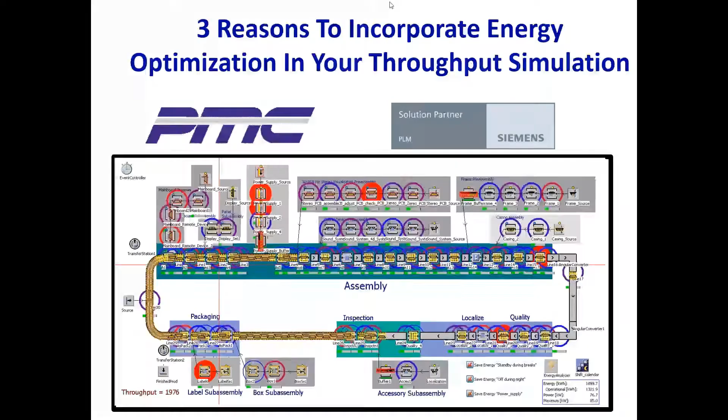We'll start with a brief overview of PMC. Next, we'll list pain points that are specific to energy efficiency and PMC's solution that addresses those pain points. Then we'll dive into the details of our solution. Finally, before we take questions, we'll wrap it all up with a demo follow-up and a couple other topics.

Before we dive into today's topics, I'd like to share a brief introduction to PMC. Since 1979, PMC has helped over 700 companies by completing more than 7,000 performance-enhancing initiatives worldwide. Our commitment to excellence has brought us to the point where we are the largest independent industrial engineering services firm in North America. Our next topic is an overview of energy efficiency optimization.

Energy optimization has several pain points, including the U.S. Energy Information Administration predicts a 56% rise in energy consumption between 2010 and 2040. The industrial sector accounts for over half of global delivered energy. Growth is predicted globally, but it's greatest in non-Organization for Economic Cooperation and Development countries like China and India. Obviously, this puts a lot of pressure on utilities to increase their capacity and on industry in the form of rising costs.

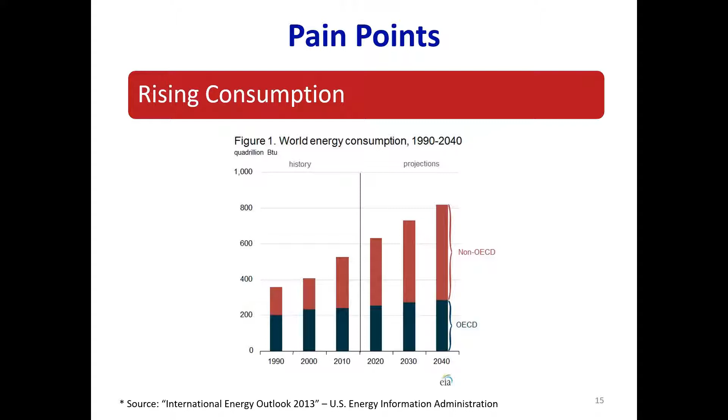The terms green along with sustainability are becoming more and more popular. More companies are incorporating green initiatives, and more consumers are becoming aware of the importance of green products and services. Green certifications are becoming more popular, and so are the number of consumers who make purchase decisions based on these certifications, as well as organizations and governments that require the purchase of environmentally preferable products and services.

The Green Seal has been around since 1989. Their standards cover over 375 product and service categories. Energy Star is an international standard for energy efficient products, appliances, and buildings originated in the USA. It was created in 1992 by the Environmental Protection Agency and the Department of Energy. Other countries like the European Union, Australia, and Japan have also adopted the program.

Unlike other certifications that are primarily known for products, the U.S. Green Building Council is a non-governmental organization that promotes sustainable buildings and cities. They developed the Leadership in Energy and Environmental Design, or LEED, third-party green building rating system that includes 4 levels of certification: certified, silver, gold, or platinum. At least 18 other nations have similar councils.

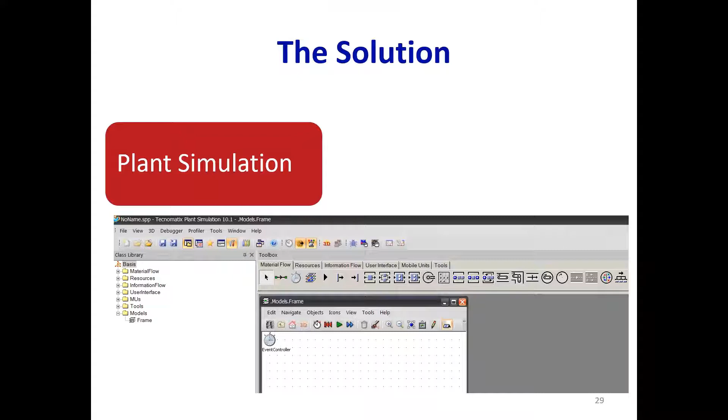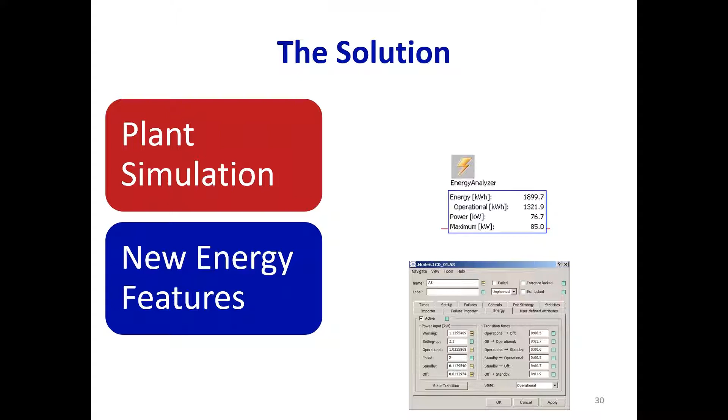Second, while Plant Simulation has always provided a powerful engine to build, analyze, and optimize your processes, the new energy features that were added to Plant Sim's recent version now let you simulate energy consumption and analyze and optimize energy efficiency. Our next topic covers the details of our plant simulation energy solution.

The first reason to incorporate energy optimizations is to reduce energy consumption, which translates to reduced cost for you. In other words, you can increase your profit margins. Optimizing energy efficiency can also result in reduced failures and maintenance needs. Energy optimization can also help you to achieve green certifications like the U.S. Green Building Council LEED certifications and to meet regulations and mandates. This can help to raise the reputation of your company with your customers and help you to qualify for possible tax rebates and zoning allowances.

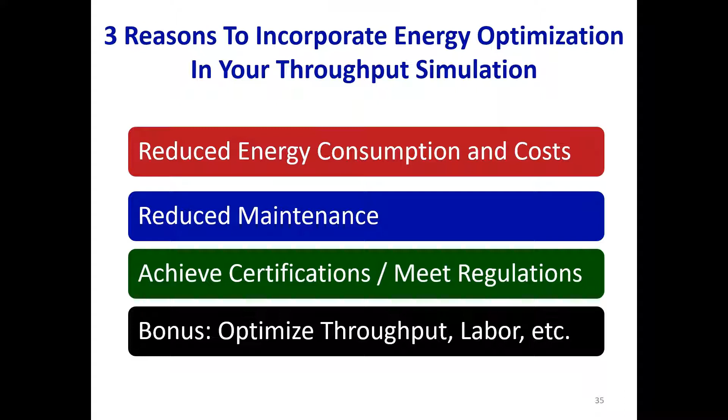Since energy optimization features are seamlessly incorporated into PlantSim's traditional throughput simulation features, you automatically have a simulation you can use to play what-if games to increase throughput, minimize labor, minimize inventory, or optimize scheduling.

The new Energy tab appears with the other input and output tabs and several objects that PlantSim provides to model stations, machines, conveyors, etc. This lets you model the dynamic energy management available in modern control units like Siemens S7-300, using the PROFIenergy protocol without any custom programming. So you can easily experiment with energy what-if scenarios in a virtual environment.

The left side lets you specify the power input in kilowatts required for a station's various states, like when it is setting up, working, failed or down, or standby. The right side lets you specify the transition times between energy states, like operational to standby.

The state transition button even lets you model the saving of energy, specifying energy state transitions for pauses or breaks within shifts, or when a new shift starts after an off-shift unplanned period. You can even choose to power up early so that the machine is fully operational immediately after breaks or when a new shift starts after an off-shift period. This lets you save energy without decreasing throughput one bit.

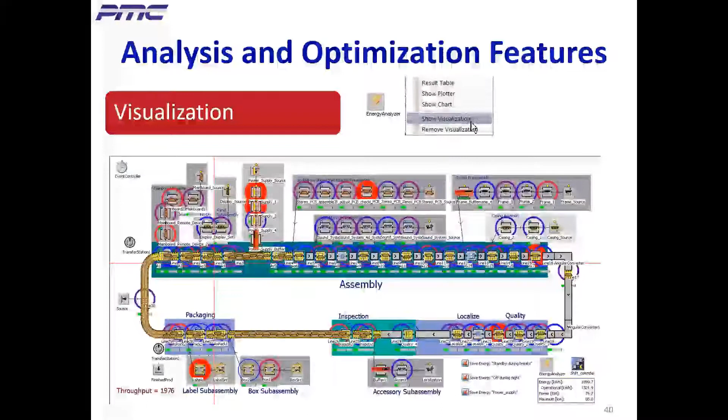The Energy Analyzer Object's Display Panel option displays overall energy statistics for the whole simulation, including total energy consumption in kilowatt hours and total energy consumption while in the operational or waiting state, as well as the current power in kilowatts and the maximum power.

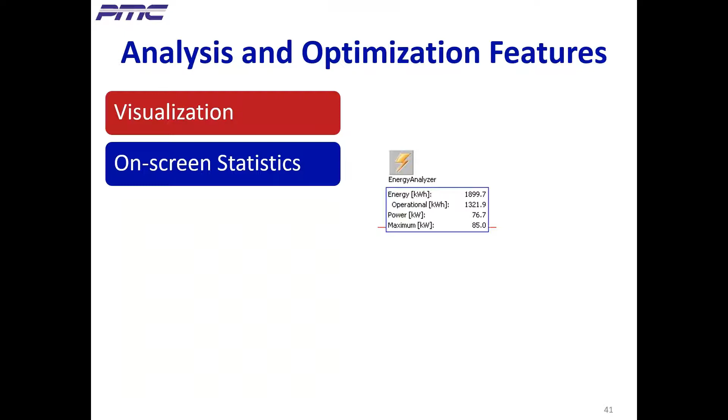The Energy Analyzer Object's diagram of the energy consumption option displays a graph that shows the kilowatt hours that each station consumed while in various states like working, operational, and standby.

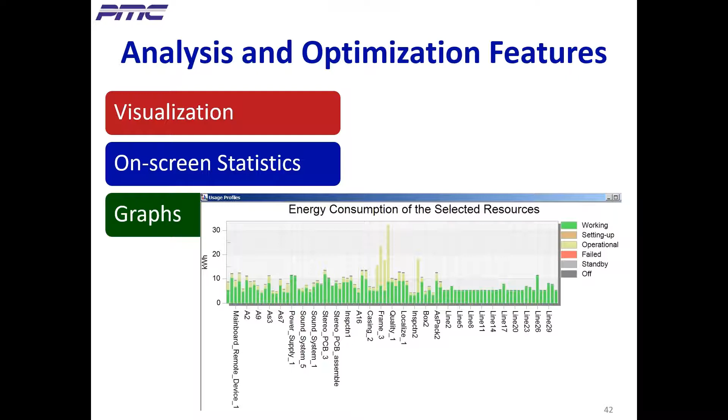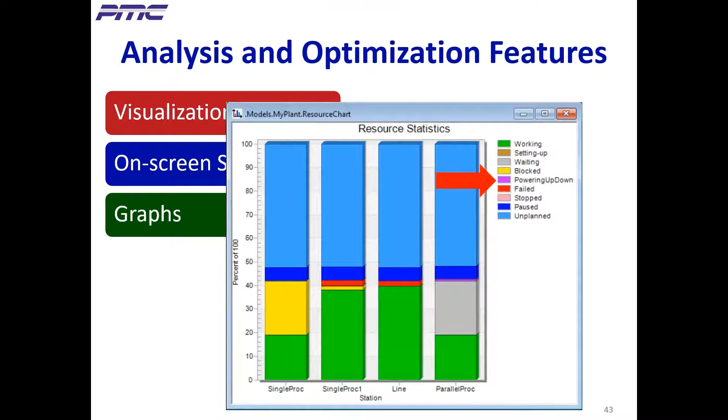And the standard resources statistics time and state chart has a new powering up and down state added to include that energy option.

The Energy Analyzer Object's table of all evaluated objects option displays a table that shows the total kilowatt hours and kilowatt hours consumed while in different states like working, operational, and standby for all individual stations.

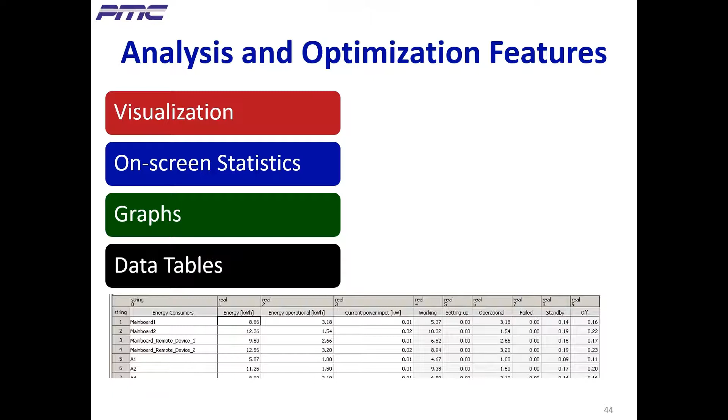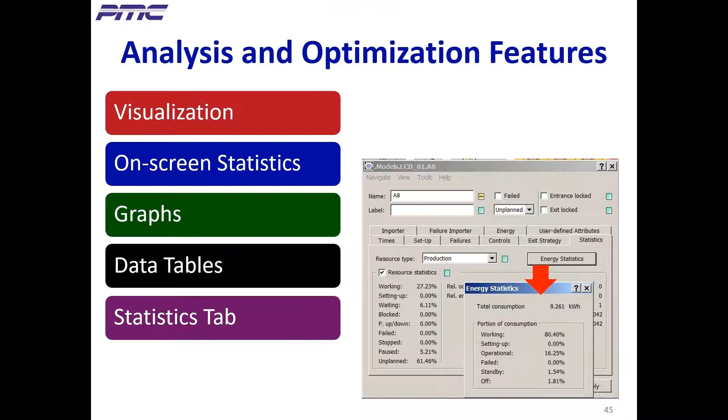The energy statistics button on the statistics tab of an individual station object shows the total consumption in kilowatt hours and the portion of consumption in different states like working, operational, standby, and off.

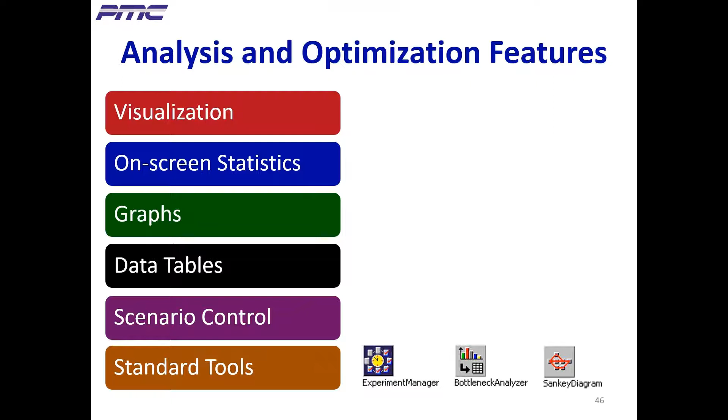PlantSim standard tools can also help to analyze and optimize your process, including the experiment manager that can automate the running of what-if scenarios. The bottleneck analyzer can help you pinpoint bottlenecks quickly. And the Sankey diagram lets you visualize the flow—the thicker the line, the greater the flow.

And now, the moment you've been waiting for, it's time to show the full video of an energy simulation of an LCD TV flat screen production facility.

Hello, welcome to PMC's Tecnomatix Plant Simulation Energy Efficiency Optimization demo of an LCD TV flat screen assembly plant. We'll start with a screen tour of our plant simulation model.

The source puts skids on the conveyor to the right, which moves skids up to the main assembly line. The main board is placed on the skid at station A1. The display panel is added at station AS3. The power supply is added at station AS5. 3D stereo visualization is added at station AS6. The sound device is added at station AS7. The frame is added at station AS14. The casing is added at station AS15.

And then the panel goes through quality, localize, inspection, packaging, and labeling processes before being removed from the skid and transferred to the finished product drain, where throughput statistics are collected and displayed.

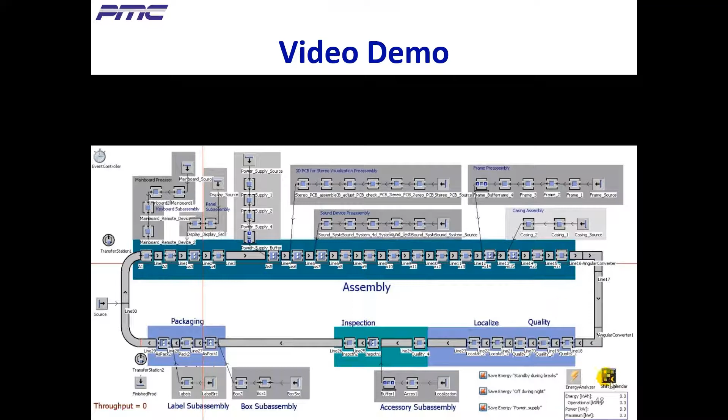As you can see in our shift calendar, we are running a 9.5-hour shift from 8 a.m. to 5:15 p.m., with a 15-minute pause or break at 9 o'clock, a 45-minute lunch break at 11:30, and another 15-minute break at 2 o'clock.

Using Plant Simulation's powerful traditional modeling and analysis tools, the existing model was optimized for a maximum throughput of 1,976 screens per day. What-if experiments also showed that a minimum of 80 skids was required to maintain that throughput.

Since Plant Simulation now can model, analyze, and optimize energy consumption, we set new goals for our plant to reduce energy consumption without decreasing throughput. The first step is to specify power inputs in kilowatts in the energy tab of the stations for all its states, including working, setting up, operational, failed, standby, and off. We also specify the transition times between states.

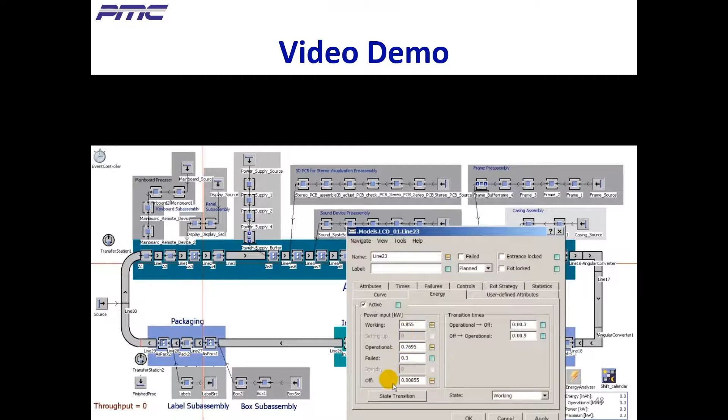Similarly, we specify power inputs and transition times in the energy tab of the conveyors. Now we'll run the model for one simulated day.

We'll run the model slow for a while so you can see everything in action, starting with the first skid being placed on the main line and throughput statistics being collected when the screens are removed from the skids after the packaging line. After one day of simulated time, you can see that our throughput is the optimized value of 1,976 screens that was mentioned before.

Since we added energy inputs for our stations and conveyors, the Energy Analyzer's display panel also provides valuable overall statistics, including 1,899.7 total kilowatt hours of energy consumed.

Let's take a look at the Energy Analyzer's Show Visualization option. The stations surrounded by solid red circles are the ones that consume the most energy. Hollow red circles indicate the next largest energy consumers. Blue indicates the least energy consumers, and purple is in between.

This visualization lets you quickly identify areas where you may want to focus on making potential individual energy improvements. This is similar to using PlantSim's bottleneck analyzer to help you identify the main throughput bottlenecks.

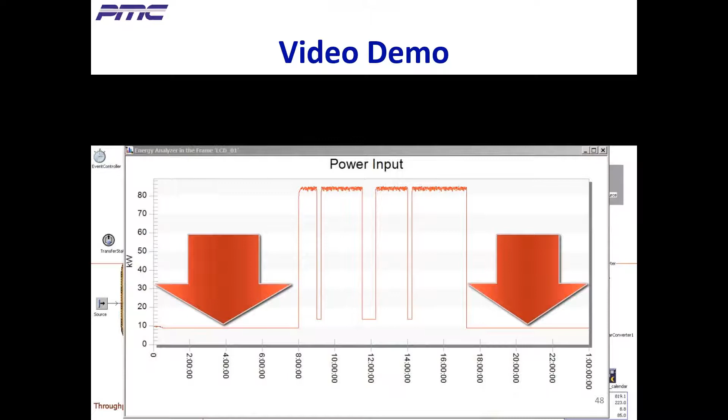And once again, we achieved these savings without any decrease in throughput. Let's take another look at the Energy Analyzer's Show Plotter option. As you can see, during off shift or unplanned time, instead of consuming approximately 77 kilowatts, our equipment is consuming just about 8 kilowatts. And during breaks, instead of consuming approximately 77 kilowatts, our equipment is consuming about 14 kilowatts.

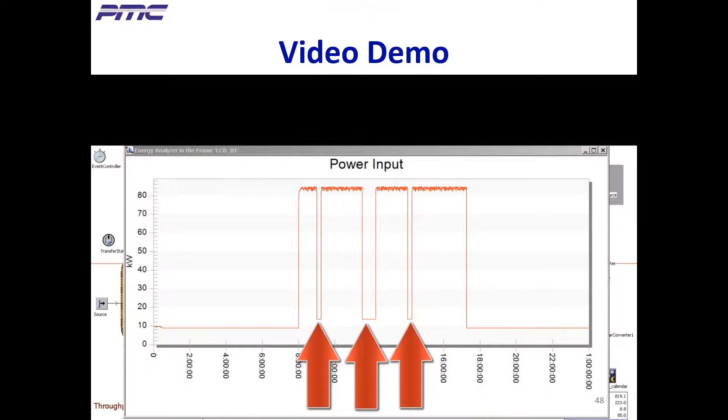The secret behind modeling these energy saving measures is the State Transitions button on the Energy tab for our station and conveyor objects. The left side tells PlantSim what to do at the start and end of a pause or break within a shift. Here, standby is specified. The right side tells PlantSim what to do at the start and end of unplanned or off shift time between shifts.

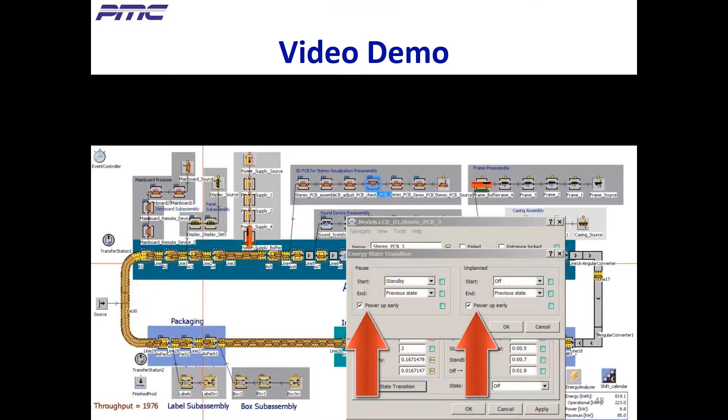Here, off state is specified. And last but not least, the power up early option lets you power up equipment early so that your equipment is ready and raring to go as soon as working time pops up, so you get no decrease in throughput.

Now, if we look at the energy analyzer's show visualization option, we can see things have improved, but power supply stations 1 and 2 are still high energy consumers, as indicated by the solid red circles. If we look at the energy analyzer's show chart option, you can see that the power supply area consumes a lot of energy while in the operational state.

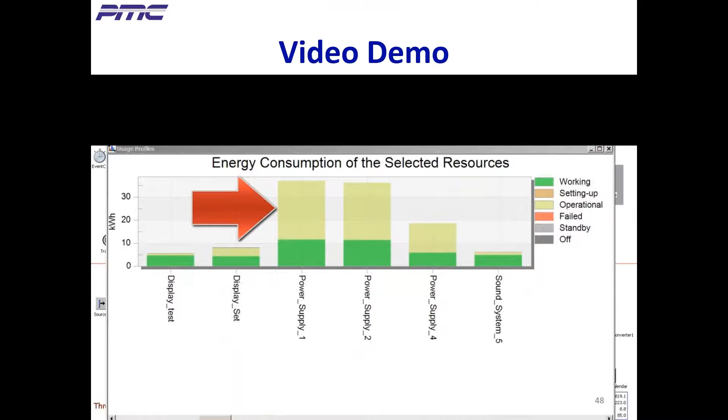We can see the details by highlighting the area in the chart. The light green areas for power supply stations 1 and 2 show that these stations consume a lot more energy in the operation or wait state than the other stations.

While running the simulation, it appears that the power supply buffer is always full. A look at the buffers chart shows that it's almost always full with 150 power supplies. Every time a power supply leaves the buffer for the main line, the power supply line puts in one more unit, hence the near straight but jagged line.

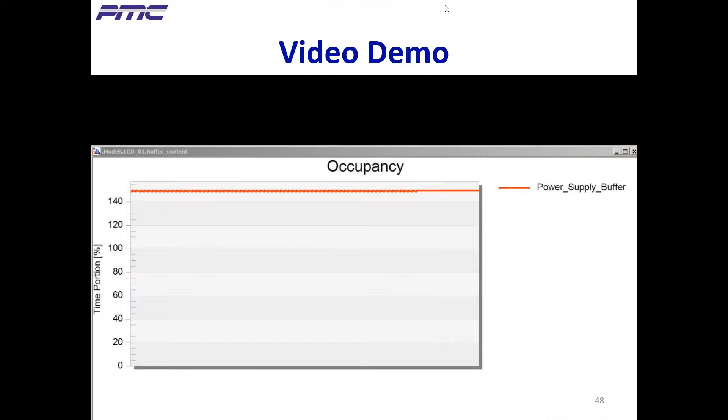One potential energy optimization opportunity in this area would be to treat this buffer as a Kanban buffer, where the power supply line feeds the buffer only after it reaches a lower level of contents. In our model, the Save Energy Power Supply checkbox sets the power supply line up so that the buffer is filled at the start of the simulation, and thereafter it's fed only after 50 units are left in the buffer.

Now, after running our model for one day, our energy analyzer's display panel shows that we've decreased total power consumption from 819.1 kilowatt hours to 755.9 kilowatt hours. And once again, we achieve these savings without any decrease in throughput.

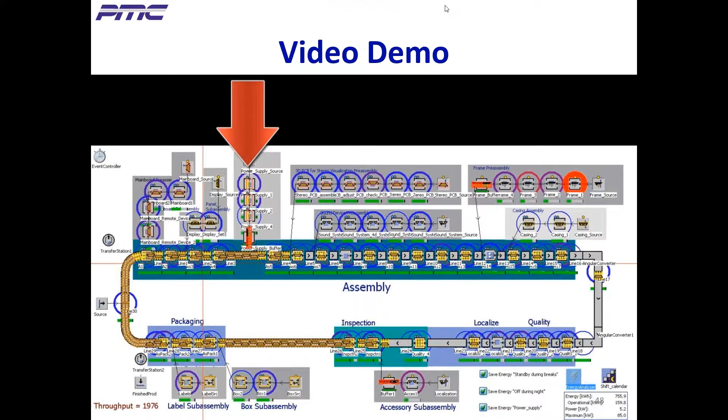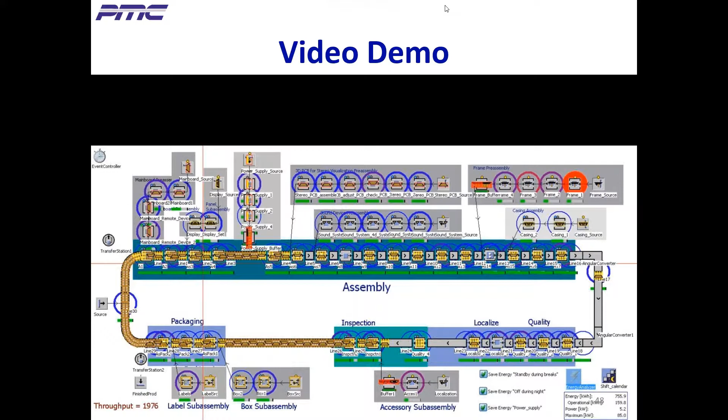Finally, if we take another look at the energy analyzer's show visualization option, we can see things have improved dramatically in the power supply area. Instead of solid red circles indicating high energy consumption, power supply stations 1 and 2 are now purple, indicating a medium level. There is room for even more optimizations, but I hope you've seen enough to see how useful Plant Simulation's new energy optimization features can be.

Before we end this video, let's review what we've accomplished. First, before this video, throughput and skids were optimized using Plant Simulation's traditional modeling analysis and optimization tools.

Then, using PlantSim's new energy features, energy consumption for one day's production was reduced from 1,899.7 to 755.9 kilowatt hours. This was accomplished with no decrease in throughput. Finally, no new equipment or costs were required, just changes in control logic.

To recap, the optimizations shown in the demo model: throughput had already been optimized using PlantSim's traditional modeling analysis and optimization tools. Number of skids had already been optimized too.

Then, using PlantSim's new energy features, energy consumption for one day's production was reduced from 1,899.7 kilowatt hours to 755.9 kilowatt hours. This was accomplished with no decrease in throughput. Finally, no new equipment or costs were required, just changes in control logic.

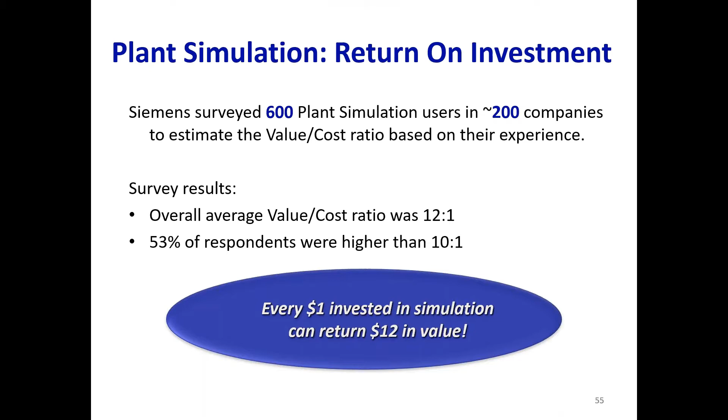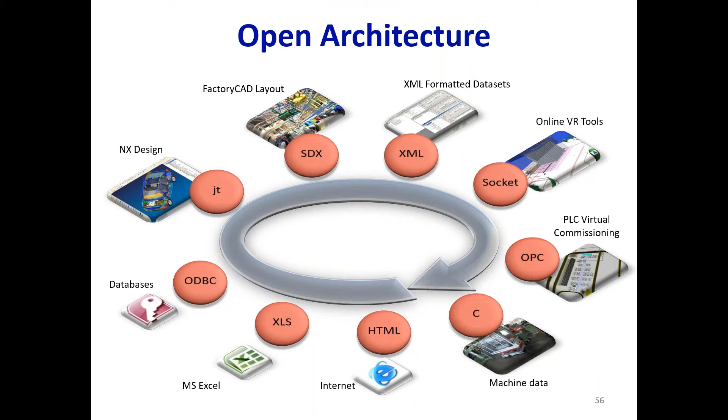As you can see, Plant Simulation's open architecture allows it to interface with nearly any other software product, including databases, spreadsheets, factory CAD, even PLCs on the factory floor. If you currently use or plan to use Teamcenter, then you'll be able to share any PLM data that resides there while maintaining the advantage of keeping current data in one place.

We'd like to mention that other libraries are also available for PlantSim that add special functionality to the powerful base features of plant simulation. The Warehousing and Logistics library provides numerous objects that slash the time required to build, analyze, and optimize a warehouse model. Visualization includes informative 2D icons and realistic 3D icons.

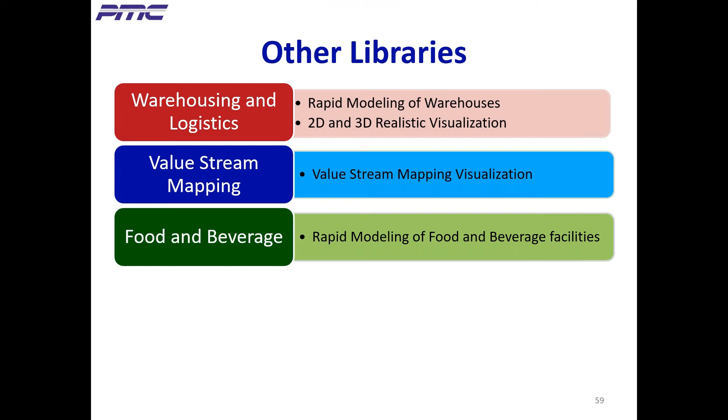The Value Stream Mapping library lets you build, visualize, and analyze your process in value stream mapping format. The Food and Beverage library provides numerous objects that slash the time required to build a food and beverage simulation model. Visualization includes informative icons that show the state of an object, like how full a tank is. Other libraries are also available that provide specialized tools.